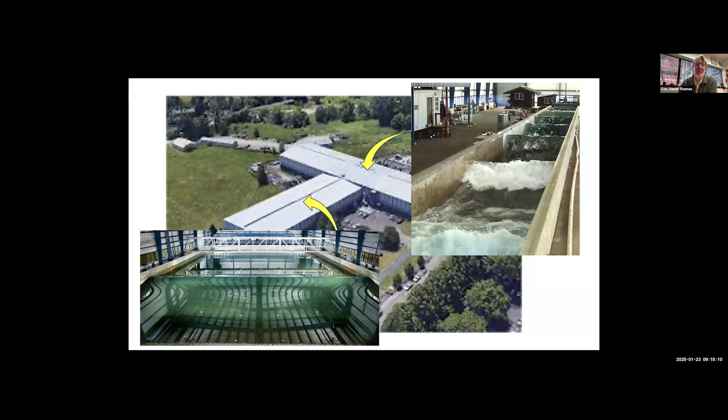Sorry for the blurriness of our slide here, but this is out in Corvallis, Oregon. We have two large facilities, the largest in the country and top 10 worldwide, for studying phenomena related to the coastal ocean, the nearshore coast. One is a flume, a long channel filled with water, with a wave maker at one end so we can reproduce the wave climate and currents. The second, on the lower left, is a basin, used if we want to look at three-dimensional effects, similar to what we're seeing on screen here.

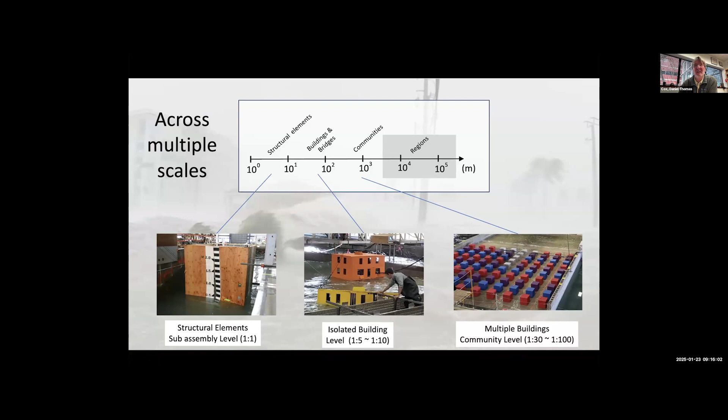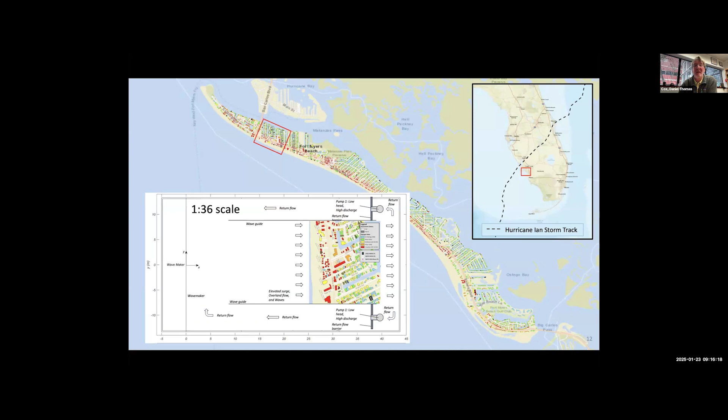So this is one example of what we do. Researchers come in, they're always a unique project, so we don't just have in situ data sitting there 24/7. We're setting up experiments, we're taking them down. We do about 6 to 12 experiments a year, depending on the size of each. These are all unique. We spend a lot of time with the PI, usually at least 12 months out, co-designing their experiments with them. Here's an example from Andrew Kennedy and his team at University of Notre Dame.

This is simulating that photograph you saw from Florida. These are representations of buildings that would be impacted by a hurricane. Inside the red and blue boxes, for example, are lots of sensors to measure how that building would respond when the hurricane hits. Also hard to pick out in the picture, there's lots of instrumentation in the water to measure the forces of the hurricane, how fast the water is moving, how high the waves are, and lots of cameras that we use.

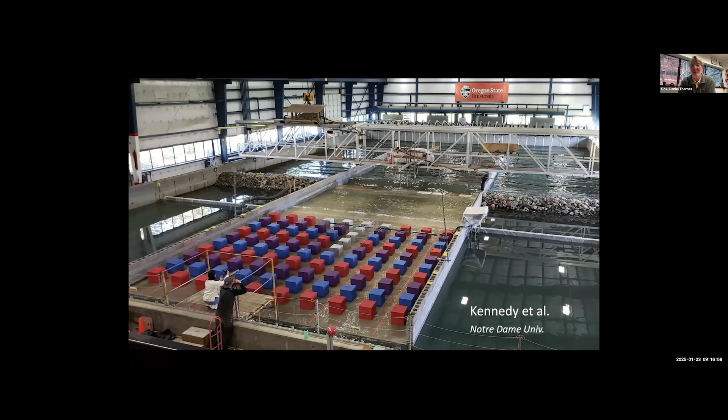Every time you touch the water, you stir it up, and you don't like to do that. So we spend a lot of time with remote sensing, optical measurements, LiDAR, and things like that. It's a graphic to show you what's going on, reproducing that hurricane.

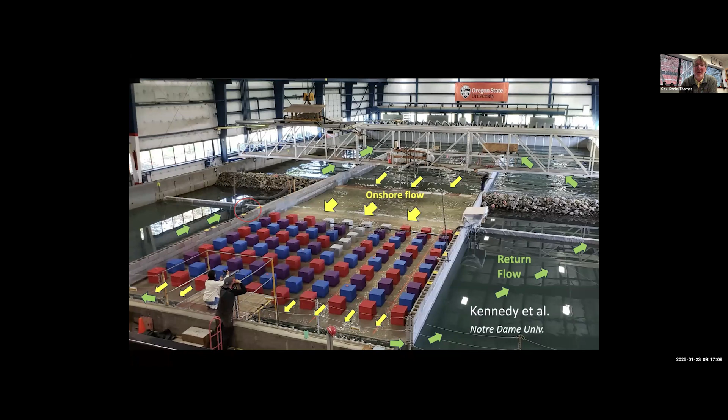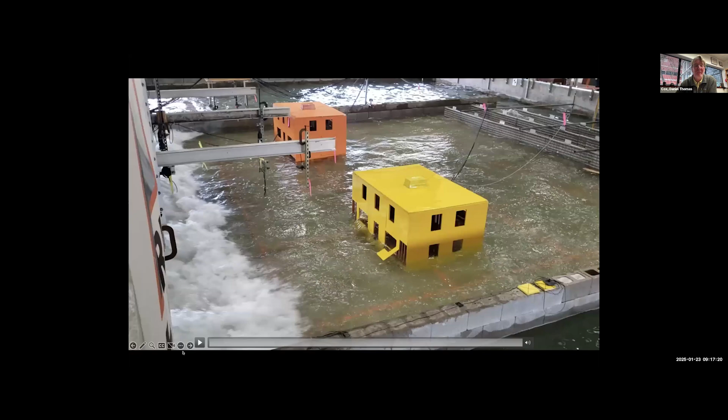Other researchers come in, they're structural engineers for example, studying the wave impact on the buildings themselves and how those buildings are destroyed during the event. Here's a picture of just the surge coming in, and eventually it leads to failure of that structure.

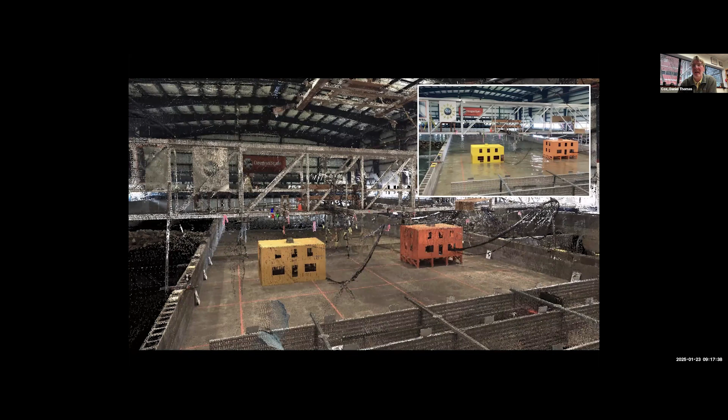So again, all fairly unique, and in this case they wanted to take lots of LiDAR. These produce fairly large data sets compared to what we're used to, so there's a fairly big data management issue around the LiDAR. And then they'll look at the progressive damage of the structure.

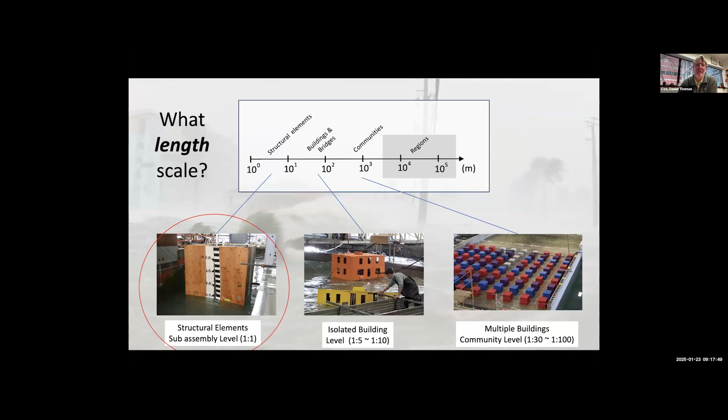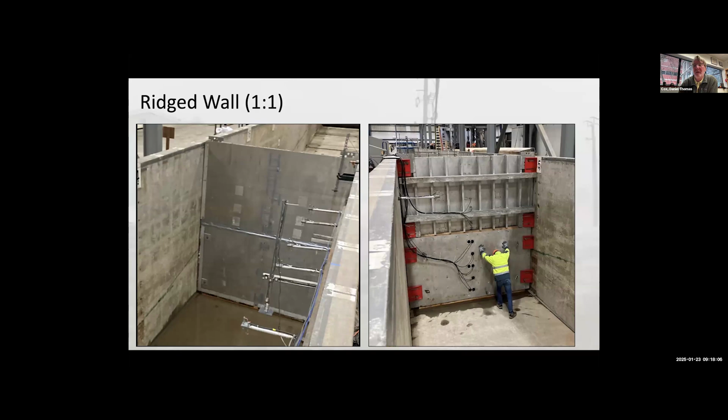Third and final example: we try to do things as large as possible, getting to prototype scale. There's a picture of our director, Pedro Lomonaco, for scale. Again, you can see the sensors in this picture a lot more easily—these are pressure transducers that measure the impact of the wave on the wall. This would be, for example, the wave of a tsunami simulated in the other channel, a big, large wave coming down.

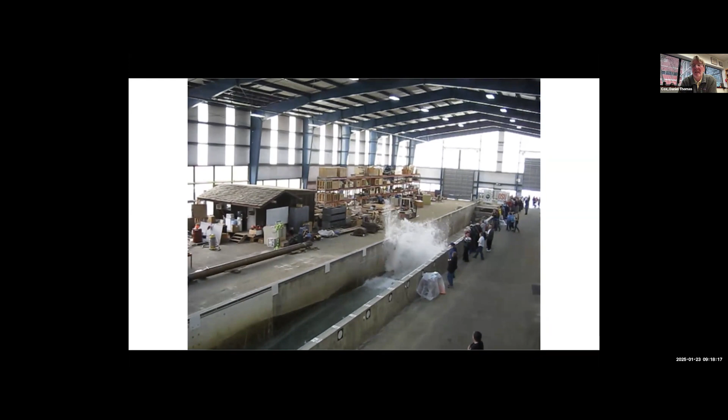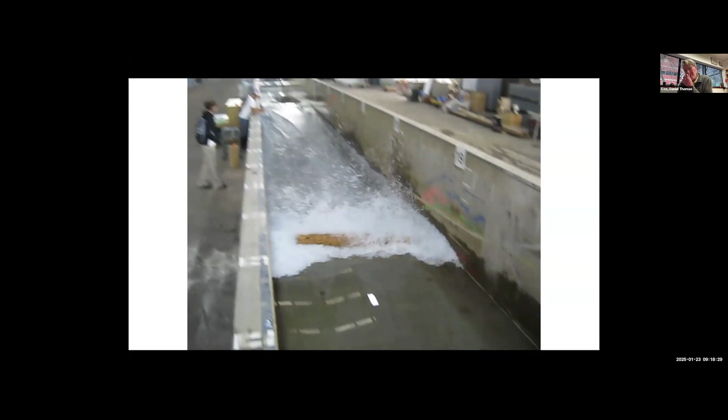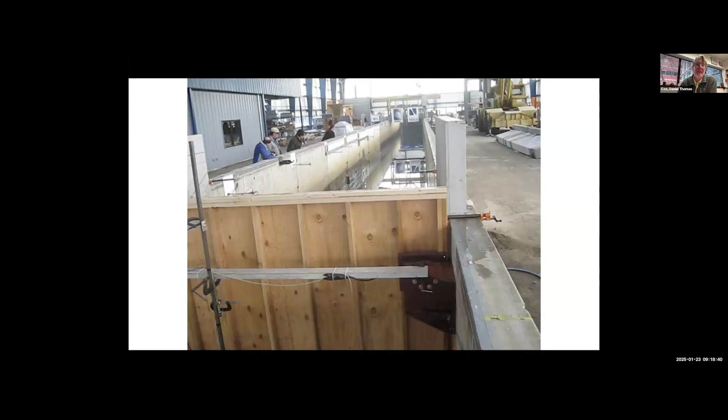It's structures, and we do lots of visits, anything from school kids to elected officials. Other examples where we're looking at the impact of debris - those types of tests require really high sampling rates so that we can get accurate measurements of what that impact was like. And then the final one is just failure and loss of a structure.

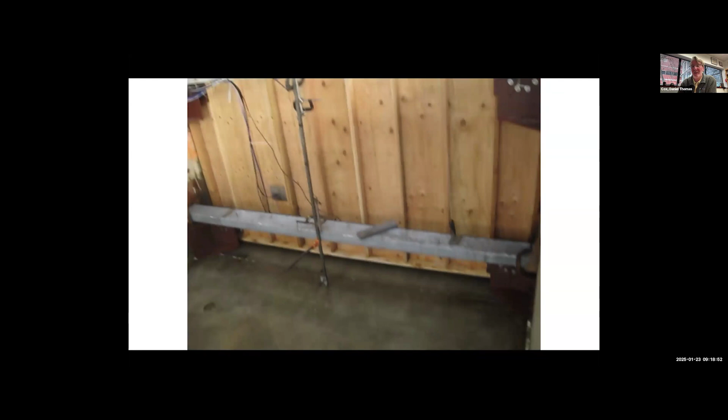These are replicated day after day. So when we're working with some of these materials, the researchers just do the same thing one after the other. But that gives you a general idea of the types of testing that we do.

Big part is how do we get all of that data to DesignSafe, and having worked almost 20 years in getting data to an offsite repository, we're pretty streamlined on that. It goes up pretty well. I think the big issue now is what do we end up publishing and who's responsible for publishing that data.

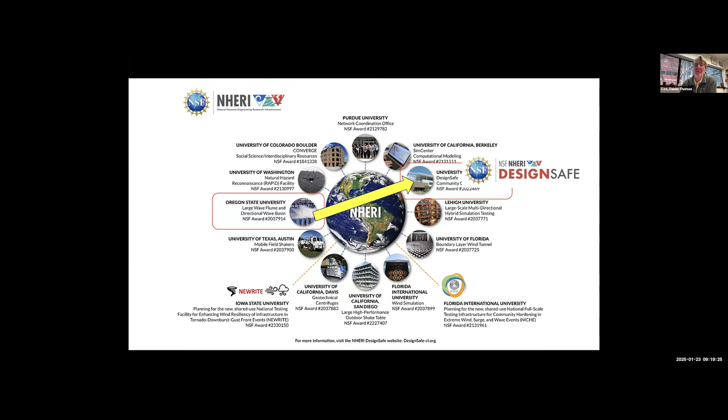But again, being replicated, all the different sites are doing the same thing. The URL to DesignSafe is in the lower right. It's more than just a data repository, it helps the entire community. It's kind of like our way of linking together around research. We have a very active community with workshops and so on.

So website's great for that, but I am highlighting today just the Data Depot. This is a phenomenal resource, hundreds and hundreds, probably at this point thousands of published data sets, ranging from field research data sets, some social science, some experimental data sets, but everything is very unique. So each person has to create their own data structure with help from DesignSafe.

So I'll just walk through one of those today. This is the example of a data set that was put together by a colleague, Tori Tomiczek at the US Navy, with our help. And the data set has a data diagram.

So each of these experiments are repeated. The PI has to do a really careful job to describe the experiment, what the setup is. We heard a little bit about metadata, how the instruments are configured, and then the events. So this is kind of the repetition of the types of experiments we do day in, day out. And all of that has to be laid out in advance.

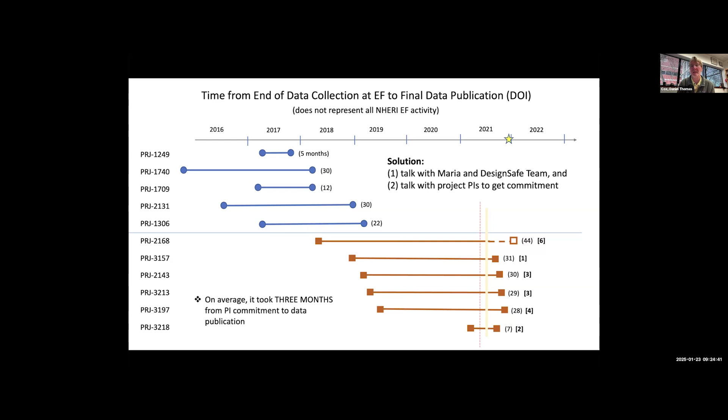We learned a lot through this. We built some best practices. We asked the researchers the top 3 things, like what worked well, what would you do differently, do's and don'ts. We've held some seminars within the NHERI community to try to educate people and share these best practices with the other sites.

One of the biggest responses was working directly with somebody who's a professional in data archiving - that was Maria Estevez on the DesignSafe team - having open office hours, not having to worry about arranging meetings all the time. You can just show up and get some really good tips on what to do. So the office hours were a huge help.

I'll highlight maybe 2 or 3 of the things, but the emphasis is on starting early with a plan, even during the experimental phase, rather than waiting until the data is collected. We really have to get our users thinking right off the bat on how they're going to publish their data.

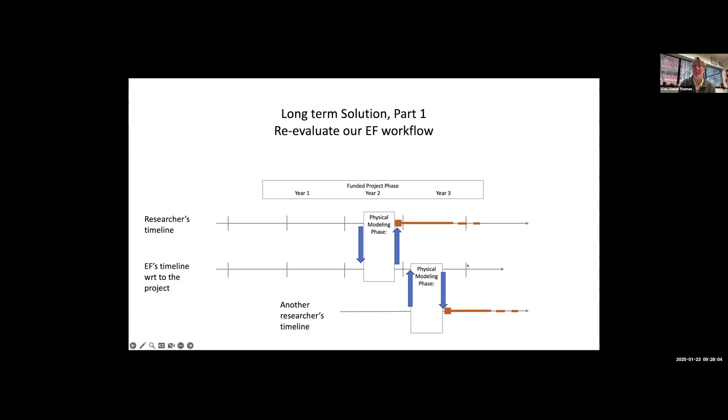But it turns out it wouldn't get done - it would take a couple of years. So what we started doing was creating this three-legged stool, if you will, being that middle person to get the PIs connected with the DesignSafe team and then have follow-ups. So after the experiment is over, really being involved in that publication process and checking in with the users periodically to just see how they're doing, emphasizing the importance of getting that data published.

So rather than leaving the data with them, it didn't take that much work for somebody on our staff to keep in contact with the research team that was using our facility until that data was published.

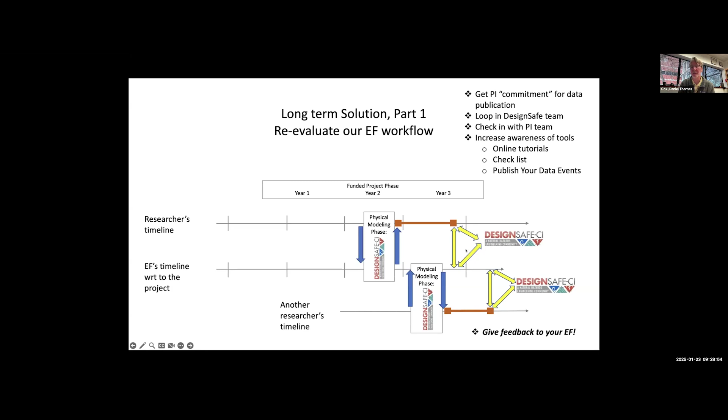That's kind of the main things I wanted to talk about, just sharing the experience that we had here. I would say overall, we've had a huge uptake in getting the data published. I think at this point things are pretty streamlined, and we feel really comfortable at the rate that the researchers are publishing their data.